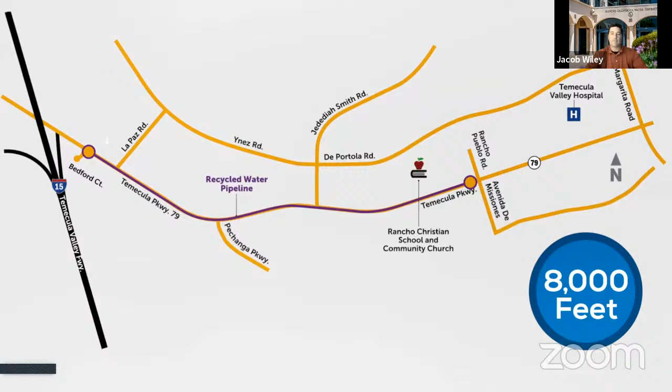The project will replace nearly 8,000 feet of recycled water pipeline running under Temecula Parkway between Bedford Court and Rancho Pueblo Road, which translates to just over 1.5 miles of purple pipeline. This pipeline has an essential role. It delivers recycled water for irrigation and landscaping to the community's beloved parks, large and small businesses along Temecula Parkway, golf courses, and schools.

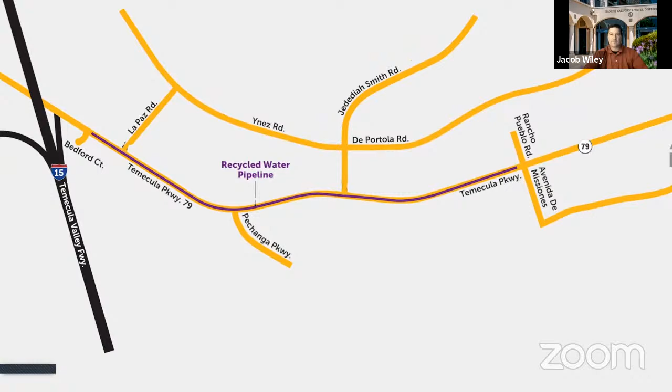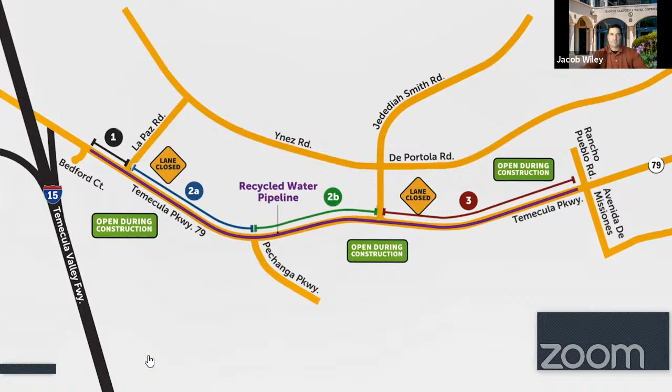The pipeline will be replaced on Temecula Parkway in 4 phases, moving from west to east. Construction will take place in the westbound lanes, while the eastbound lanes stay open. During construction, westbound Temecula Parkway will be reduced down to 1 lane, while access to neighborhoods and businesses will be maintained at all times.

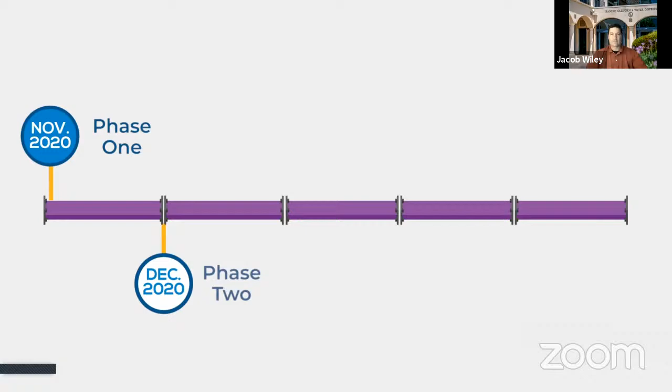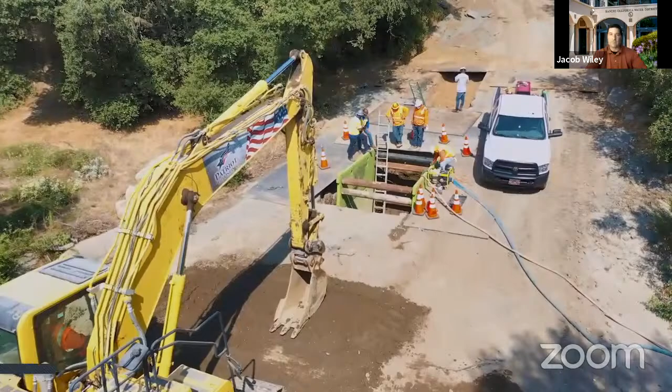Traffic delays are expected on Temecula Parkway. Alternate routes are available in all phases, with the exception of Phase 1. Construction will start November 2020 and is anticipated for completion in May 2021. We've tried to make construction as easy as possible for the community through a compressed construction schedule and longer daily construction hours, so we can avoid the disruption of multiple road closures spread over a longer construction period.

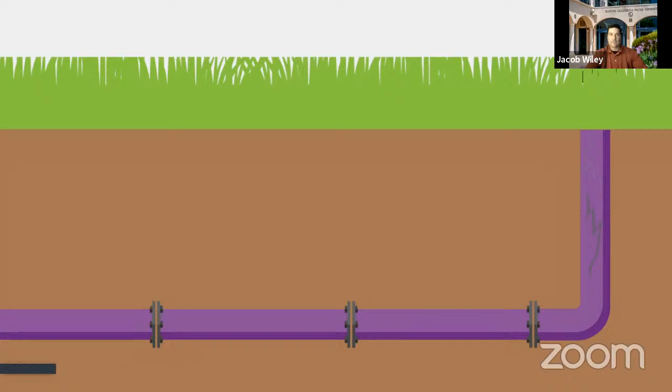You might be wondering why Rancho is doing this work now. The pipeline has become corroded over the past 20+ years and needs to be replaced. It is being replaced now with an upgraded, stronger material to avoid potential for future pipeline breaks, which are expensive and impactful for the community. We'd rather deal with the impact of construction now, rather than frequent unplanned inconveniences that will only continue as the pipeline gets older.

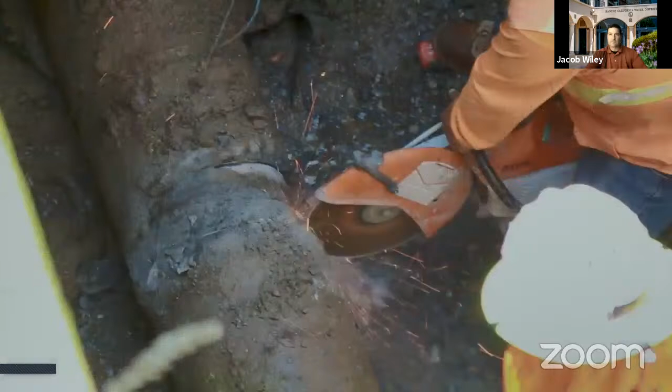The more we use recycled water for things like irrigation and landscaping, the more water is available to district customers for drinking, cooking, laundry, baths, or showers. The Temecula Parkway Pipeline Replacement Project offset enough water to provide drinking water for 16,000 people per year, which is about 10% of Rancho's service area.

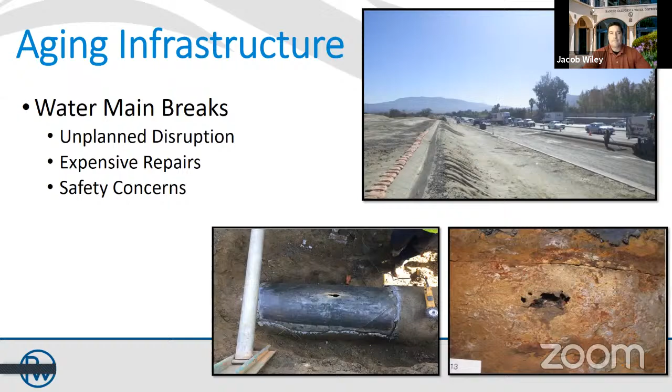That shouldn't be it. That should not be it. Hold on just a second. Give me a second to see what happened. I'm not quite sure, but I'm going to reshare my screen. Here it is. Okay, I'll just continue to talk through it.

We actually started this design back in 2017. We completed the design for the replacement, and in 2019 we put the project out to bid. At that time we received only 2 bids on the project, with elevated bid prices — an initial bid price of over $6.7 million, several million dollars above what we originally anticipated the cost to be.

We dug into that with the interest of our ratepayers, since it seemed too expensive to us. But also the feedback from contractors was that because of the constraints on the project, it was going to draw out the schedule, with very limited progress day by day. So we decided at that point to take a look at the constraints on the project and see if we could do some refinements.

We wanted to accomplish two goals: first, cost savings for our ratepayers, to get the cost down without sacrificing the infrastructure or the pipe we're putting in the ground. We were looking at the long term, but asking can we change the project constraints to reduce the cost and also reduce the schedule. That was very important to the city and to us — to reduce community impacts, let people see progress, and get this thing over with and in the ground.

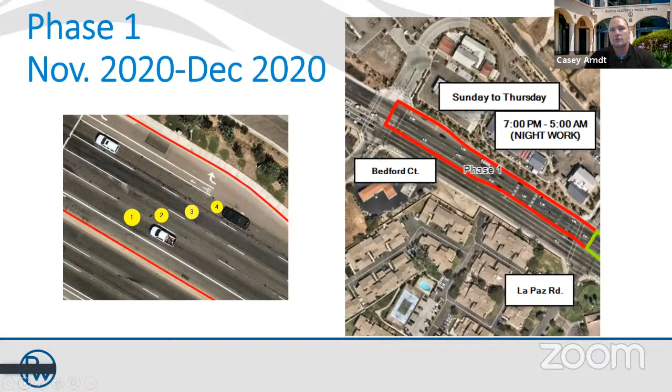One important thing to note is why we put numerical numbers on the lanes on the left-hand side of your screen. The number 1 lane is the fast lane, the second lane is the next lane to the right, and moving all the way to the right, the last lane is the slow lane, usually right next to the bike lane. All the traffic control in this project will close the first 3 lanes, or 2 lanes in phases where there are only 3 lanes total. So basically the slow lane, the number 3 or 4 lane, will be the only lane open during the entire phase or project. That's why the impacts are going to be pretty great, because we're reducing it all the way down to a single lane.

But again, we put together the detour plan to use De Portola as an alternate route. Once phase 2A is complete in its entirety, we'll move to phase 2B. Next slide, Grace.

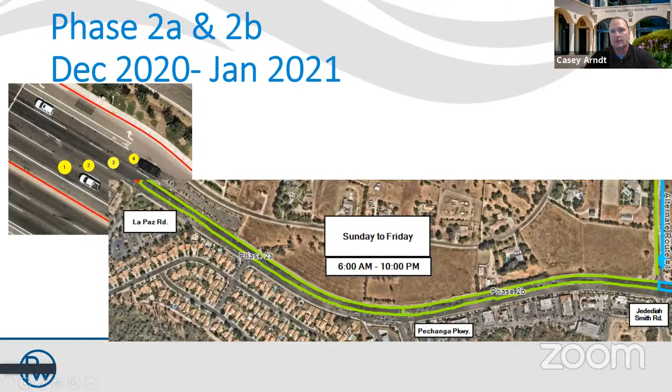Next slide, Grace. The last phase, phase 3, goes from Jedediah Smith Road to Rancho Pueblo Road. This phase is different from phases 2A and 2B in that it is only daytime work, and the traffic control does come down when they are not working. So the work hours and the traffic control are Monday to Friday, 9 a.m. to 9 p.m. The traffic control will not be up 24 hours a day, 7 days a week on this phase, and again, no night work during this phase.

That's kind of a brief overview of all of the phases. Again, I want to make sure everybody understands that the work is only in a single phase at a time, and there's never concurrent work in any of the 2 phases at once.

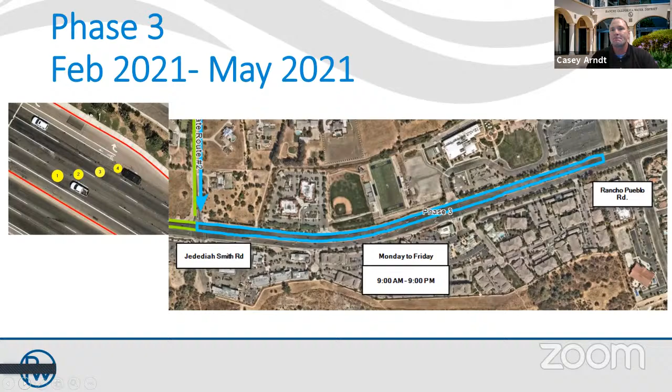Next slide. So here's the overall map. It shows the alternative route I spoke of, using De Portola Road as an alternate. We encourage everybody to use any means they can to find an alternate route away from Temecula Parkway, because we understand the traffic impacts are going to be there. We're trying to do everything we can to get the contractor moving as quickly as possible and get out of each phase as quickly as we can.

And if there are any questions, I'm certainly available to answer those in terms of traffic control or the construction project itself.

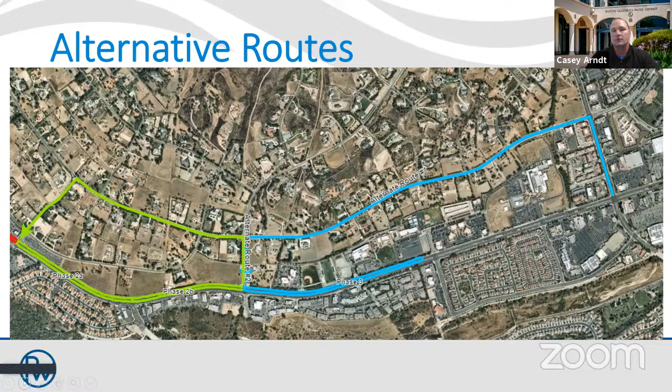Thank you. So now we'll go ahead and go over some Q&A questions that we do have. Here's the concern that we have.

The traffic today on De Portola averages 55 miles per hour. This will have an impact on both sides for travelers and residents. Casey, would you like to address this concern? I answered his question earlier about this, but understand that the speed limit on De Portola right now is currently 45 miles an hour, so 55 is in excess of the posted speed limit. We've worked with the city of Temecula, and we're going to work with the Temecula Police Department to make sure the reduced speed limit of 35 miles an hour is enforced during the construction phase. I understand slowing down traffic is going to have some impacts on commuters, but safety certainly is our first concern.

Next question: what is the relationship between this pipeline and the one that broke on Overland in front of Costco? Is the one on Overland also recycled water? If you know, is it similar size, material, and age?

I'll take that one. There is no relationship between this one and the pipeline on Overland. Different materials. They are the same size—actually, no, the one on Overland is 16 inch, so 16 inch and 20 inch. The one on Overland is a potable water pipeline, but it was PVC. It was installed in generally the same time period, mid 90s. That one really exhibited much different issues though—not a steel pipeline, it's plastic. It really had some construction defects.